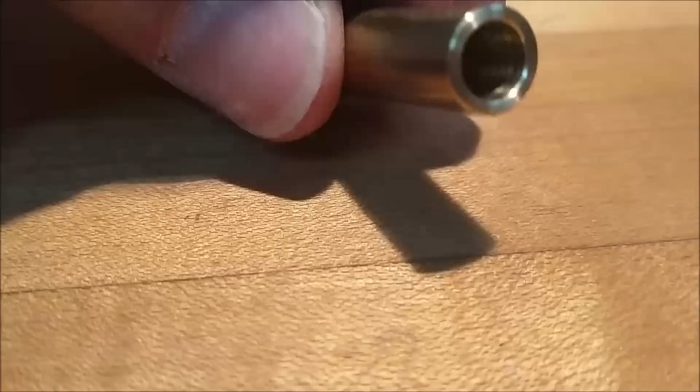Yesterday's effort was the production of these little guys right here, and this posed an interesting challenge because it is so short. This was actually done in an arbor that allowed the part to go down inside of it. I'll show you what the blanks look like. Started off looking like that and ended up looking like that. This particular arbor is the manufacturing arbor, and it is hollow from behind, so the arbor could stay stationary and I wouldn't lose any of my readings on the digital for all the cutters and the rotary table work that was done. Now these were done exactly the same way as the long ones in the back, these guys.

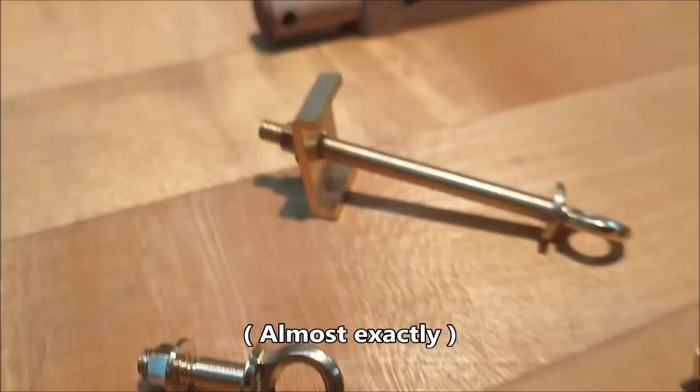I need to be honest and tell you that I was not looking forward to doing these guys because of the inherent challenge due to the length. You really can't get carried away on it because that's a 5-40 thread, a 3mm, 125 diameter thread on brass. So I didn't want to break them off.

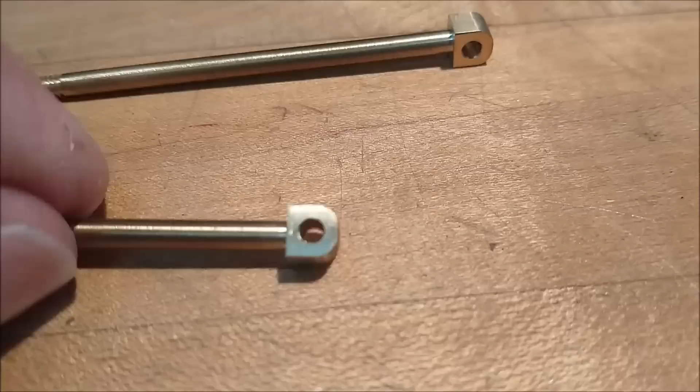Today's challenge, and one of the closing elements, is to make this little round hole in the end of this guy square. I'm going to try it two different ways, maybe one different way. But my mind tells me that I should probably set up the broach, punch these out square, and do it right. Once that's square, the wedges come into play to lock this whole thing together.

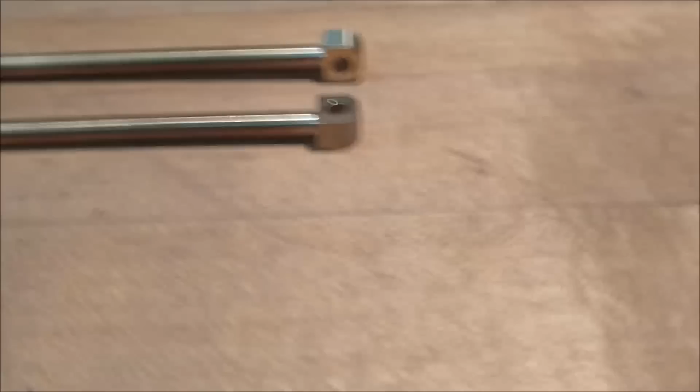The chassis is coming along nicely. This is the chassis in the back. And the tapered hole, or the tapered scallop mark right here, is simply done with a straight boring bar, and the block is set on an angle. Because the block removes more material in the back than the front, because it's on an angle, you get that tapered look.

Mr. Compressor checking in, saying good morning.

All right, let's move over to the mill. Set these guys up, get this done, move on.

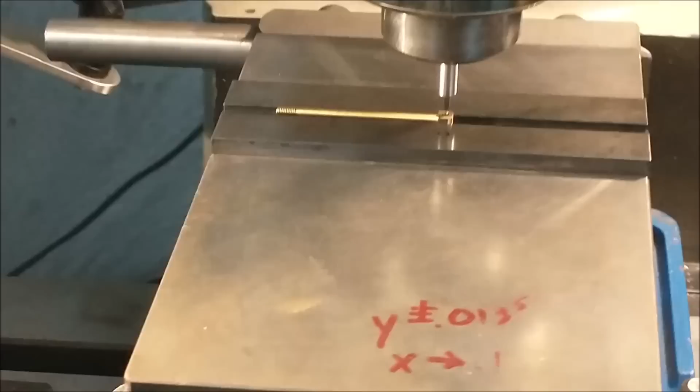That's the tiny little piece right there in the middle.

That slot is about 2.5 millimeters long, about 2 millimeters wide. I'm going to leave the original pilot hole witness mark on either side. I just want the top and the bottom flat.

Let's make the wedges. A little closer look at the final product. Top and the bottom are squared off so that the wedge seats in there better than it would on a round. Ideally a tapered slot would have been best, but that's just pushing my luck.

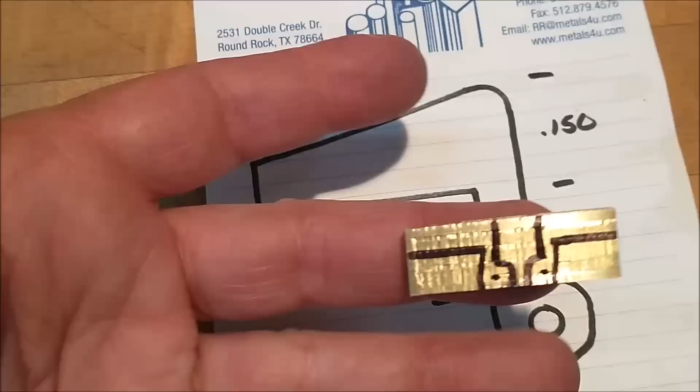The wedge I will attempt to make is going to look something like this. This is probably pretty rough, forgive me for that. This is the material I'm going to start with, and this is how I'm going to do it, back to back. First thing I got to do is narrow this down to about 2 millimeters. I know the slot is about 0.081, so I want this to go in there comfortably without too much side-to-side wobble.

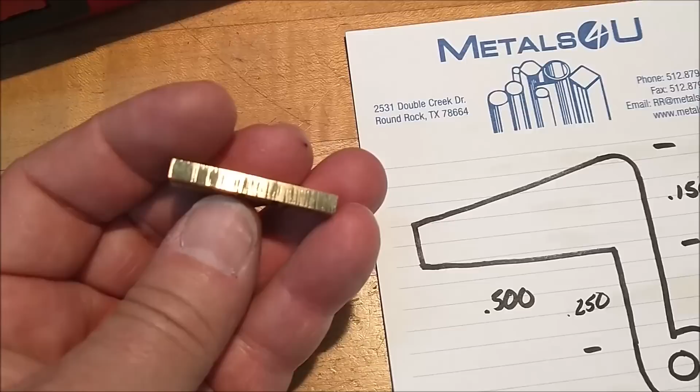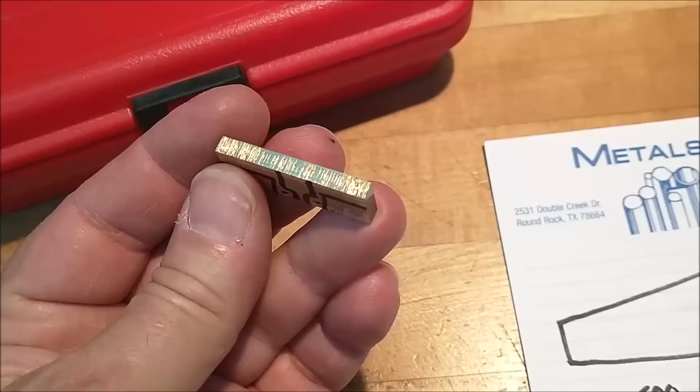Short of using an adjustable parallel to achieve my height, I am going to side mill this, clamping one end at a time to bring it down to the desired thickness. That's not a bad way to go, but it's got to be done in a climb cut. So if you have a mini mill, make sure that your table is snugged up and sufficiently locked, just so it doesn't run away with you. Let's put it in the vise, show you how it's done. I'll show you how I'm going to do it anyway, one of many ways, I'm sure.

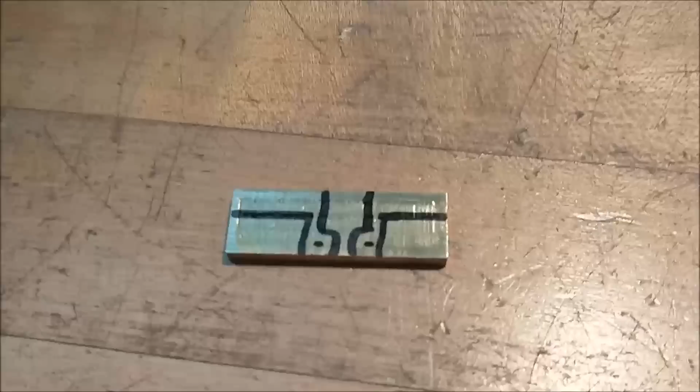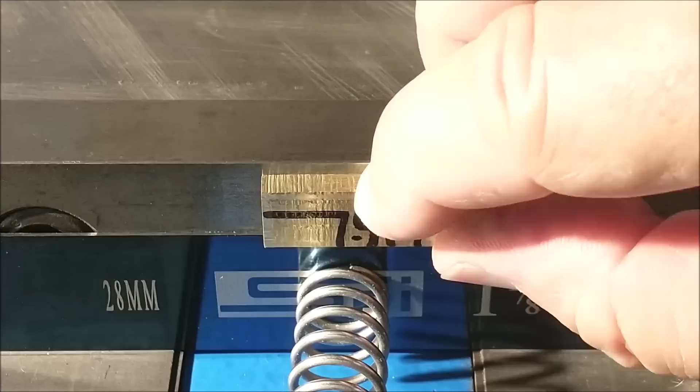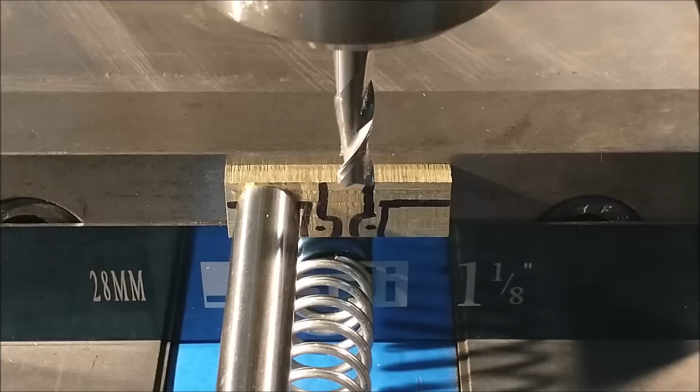First thing you want to make sure you do is have the entire part supported against the back of your machine, or the back of your vise. The height of the part has to be subsurface for the best results. I'm going to use a pin, and I'm going to keep the pin biased to one side of the blank. This will make sense in a second. The cutter itself needs to go completely past the part for a full side climb mill operation. I'm going to be cutting from right to left, so the rotation of the cutter is driving this material against this jaw. Try not to run into your pin.

I've zeroed out my Y digital. I'm going to take a measurement now, put the part back in, and finish the thickness.

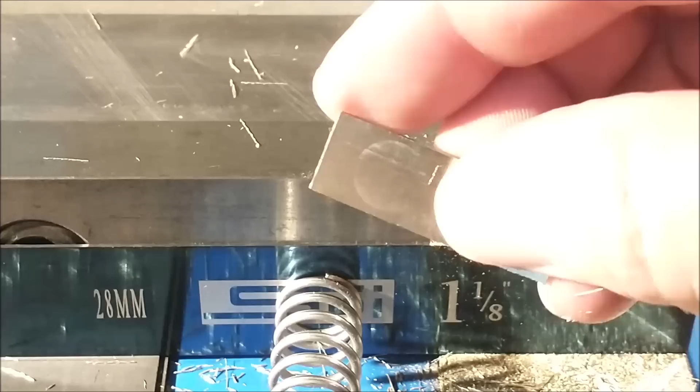That is a very reliable, very solid technique, and I'll put a link to a video showing you how to make exceptionally thin parts that you can actually profile into the face of your material. Put the part against the jaw, then run the cut exactly the same way I did, and as the cut progresses, the part will actually just fall out. It's a beautiful technique.

Well, there you go. That is 78 thousandths material, 2 millimeters, and now I'm going to make the wedges.

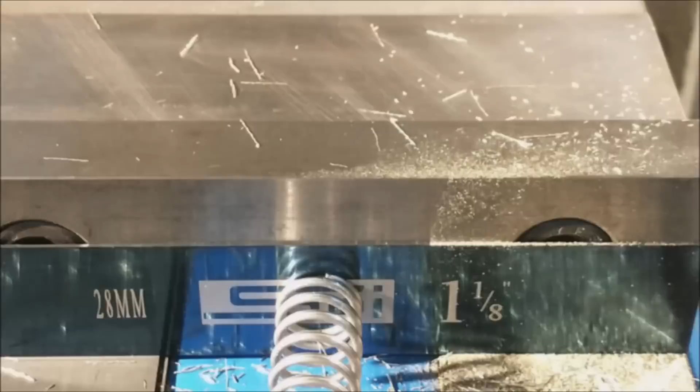Using a very similar setup to how the material was thinned down, I'm going to make a notch on the end.

The height of the bottom of this cutter is zeroed out from the top of that parallel and then elevated to the thickness that I'm looking for.

I will dive the cutter into the aluminum part and walk the cutter to the camera left until I see brass chips flying. That'll be 0,0. At that point I can form whatever notch I want on the end of this part.

I'm looking for 125 left over, about 3 millimeters worth of tang, and 500 over - 12.7 millimeters, half an inch, 0.5, whatever you want to call it. Let's put the notch in.

Then I'll turn the part around. I could do this end to end, but I'm once again relying on the climb nature of this cutter. Actually, it's the conventional nature of the cutter at this point because I want the material driven against the aluminum so that it doesn't clap.

If I bring it around this side, this side will have a tendency to lift as the material gets thinner. That'll make sense in a second. Here we go.

I think you can see the shine on the top of that. This is now X0, and whatever I dial in will be the thickness or the projection of the little wedge. Bear in mind that the wedge is inverted in this setup.

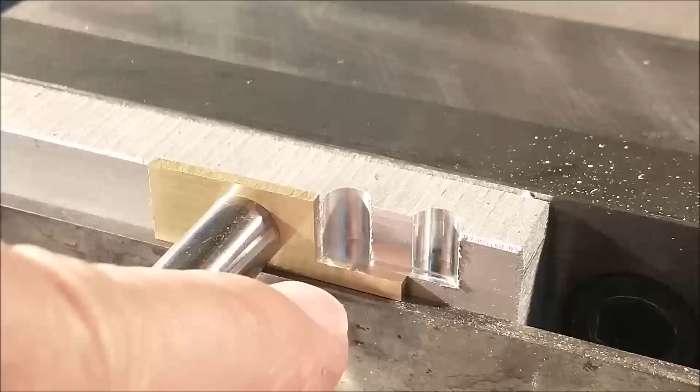The remnant left behind, the top will be the tapered section. That's what's going to cause it to lock. And the distance from the shoulder to the end is the thickness of the wood where the trunnion strap lays down. So I'm going to flip this around and do the exact same thing to the other side.

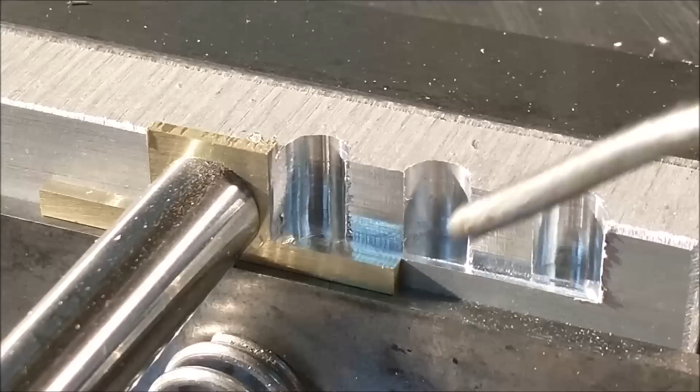So far so good. Now we're going to lay it down flat, put the chain hole in it, and start to profile the outside. A lot of this work will be finished with a file because it's not an elaborate piece. This is probably something you could do with a file anyway, but I chose not to do it that way. Here we go.

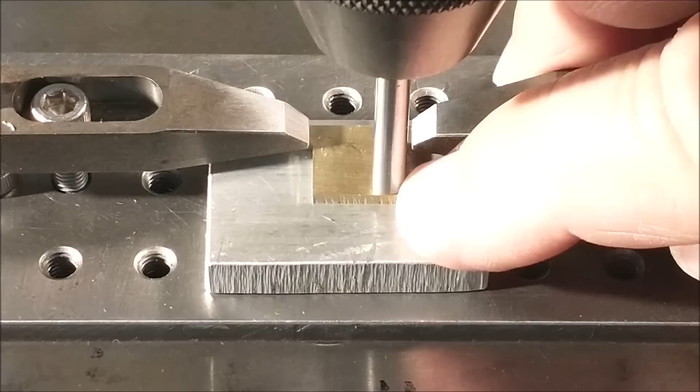Next operation in line is the chain link hole in the inner radius for the outside profile. This is a meatball operation - there is nothing precision about this, so I'm doing it with a pin. I'm lining up a pin tangent to the outside of the workpiece on the face and the side, both sides. This will be my incremental side on my digital, and this will be my absolute side, so I don't have to reposition the part twice.

Let's start here. Why not? Why not? You're already here, right? Why go back?

Okay, if you're scratching your head wondering exactly what that was, what happened? What did he just do? Oh, I don't want to say it. Here we go.

Back of the part will come down here, blend into that radius that I just made, and then it'll go around and off like that. So there's your part. Did the inside radius.

This will be done either by hand or maybe I'll just pop it on a rotary table with a pin. It'd be real easy to pick up right now. Just don't take the part off. Do both sides and come back and relieve the web right there, and that should be the end of it.

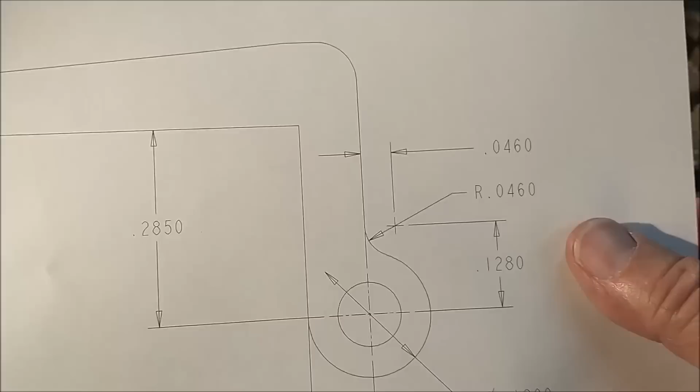If you're curious what those holes are for, with the parts positioned back to back, the lower holes are the center hole, that's where the chain is going to connect, and the upper hole is the radius for the back contour.

Using a pin the same size as the hole, I'm going to take the entire fixture over to the rotary table, clamp it down, and just interpolate this side off, and probably run that edge as well.

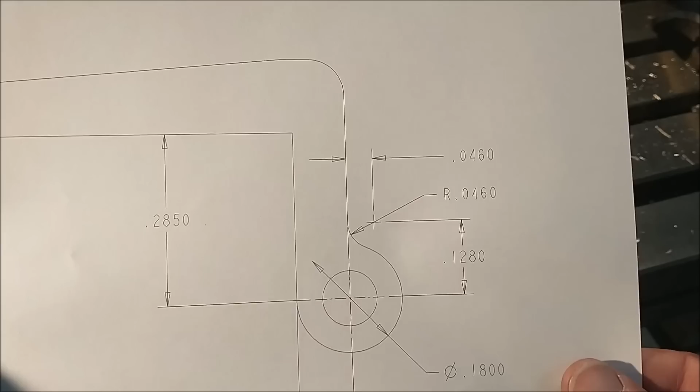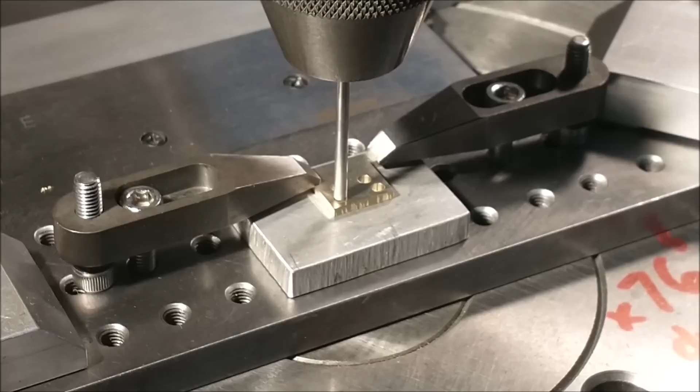The entire fixture has been relocated to the rotary table. Drill chuck with a pin in it, and the drill chuck center is directly over the center of the rotary table. Everything is clean and green.

We're going to shift the table off to the center of the second hole, the top one, and just interpolate the bottom round. Should be quick. I've also relocated the clamp a little farther in so I get a good bite on this piece, because I intend to cut this piece off while it's in this setup.

I'm going to go clockwise around the lower hole, starting at the top hole. Lower hole is over the center of the rotary table. Let's do this.

Okay, moment of pure honesty here. I am feeling way too much resistance from this cutter, and if you've got a good eye, you can see this cutter actually deflecting as it's hitting the brass. For a high-speed cutter to deflect when it hits brass, not cool. I'm going to flip this upside down and start over.

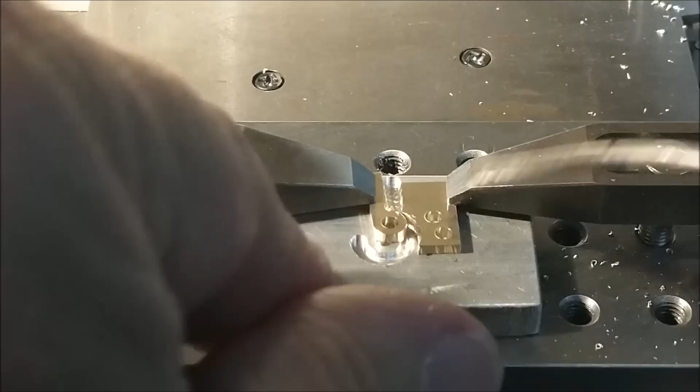That was a close one. Ouch.

Well, I can't tell you how much I didn't want to see that happen. That clamp is really tight, too.

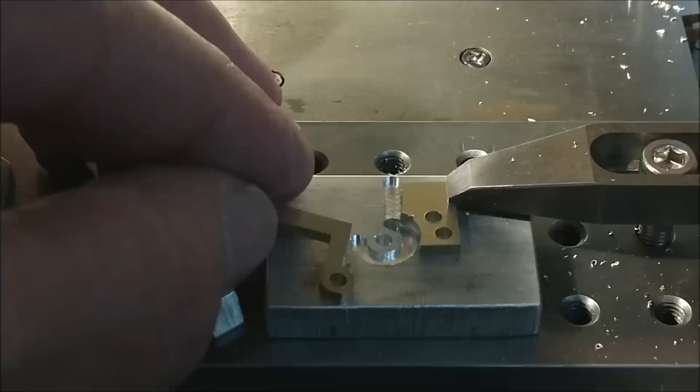Obviously not tight enough, Joseph. Let's see what we got. I'm about 15 thousandths away with all my numbers, so I am very happy that it jumped the way it did. Holy mackerel, holy mackerel.

There goes my nice setup. Okay, you see where I'm going. Got to do it off camera. It's going to take a while. Bummer.

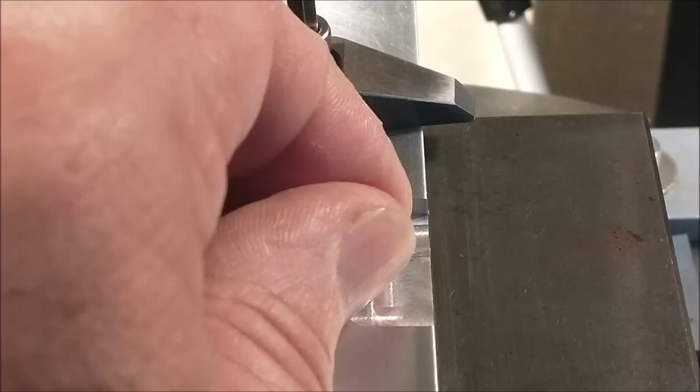Somewhere between the last shot and this current shot, I came to the realization that I am taking the long way around with these parts, but since I started it, I am going to finish it. This is the new fixture that I'm going to use, and it will constrain the blanks so that they don't go anywhere unexpectedly. That was unpleasant, and I don't want to see that again.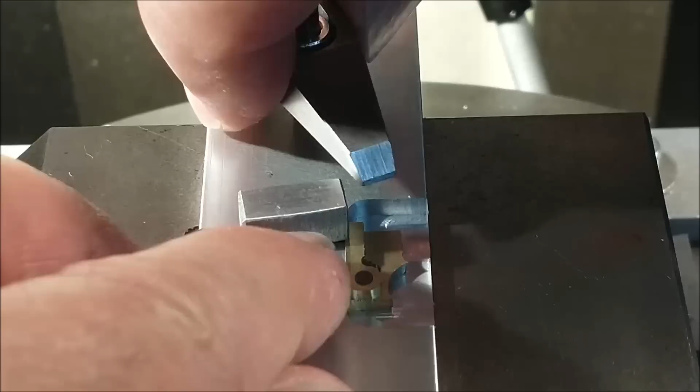So here we go, I'll stick this puppy up on there, lock it down. The pin's just going to keep it from sliding out, the track is going to keep it from going this way and that way, and the clamp is going to keep it down. Clamps should be used for holding parts down, not for keeping them from rotating or whatever else. Use a physical feature for that.

Let's get back to where we were before the unfortunate shift in the workpiece. Let's see if we can finish this geometry up here on the top and the bottom. I am going to take a very superficial rotary cut to create a track on this side so that when the cutter comes around on the actual part, it doesn't load up and cause something terrible to happen. So that'll be the first thing I do.

The cutter will be positioned. Right now the rotary table is the center of that pin, but the cutter is going to be up and over, offset to the radius of the vertical leg right there. So it's going to be right back there in that corner.

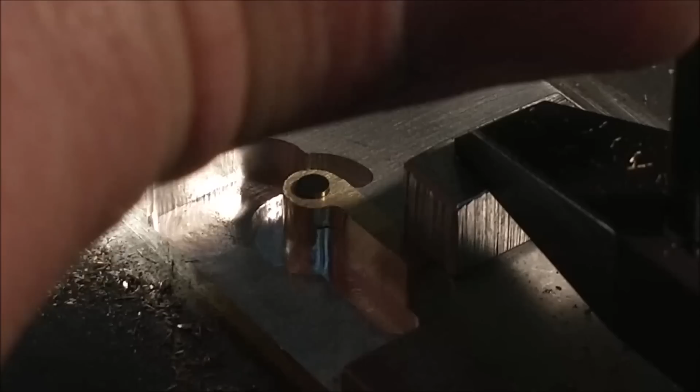Very much like this camera. Let's see what we got. Yeah, you can see a little bit of noise on the top part.

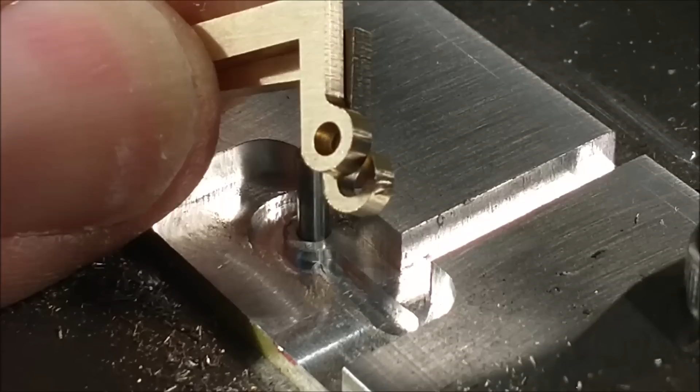Overall, I like it. For what it is, that is just fine. Let's deburr it, put the taper on the top, make it work.

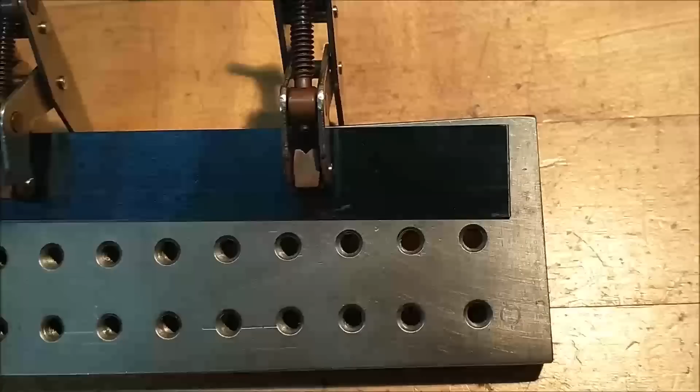Next operation after the profile is complete is to put this mild angle on the top. And when I say mild, that's about a 2 or 3 degree angle at the most. This is the fixture that I'm going to be using. It is incredibly primitive. This is an ultra thin parallel clamped on there at the desired angle, and the part will register right here on the corner.

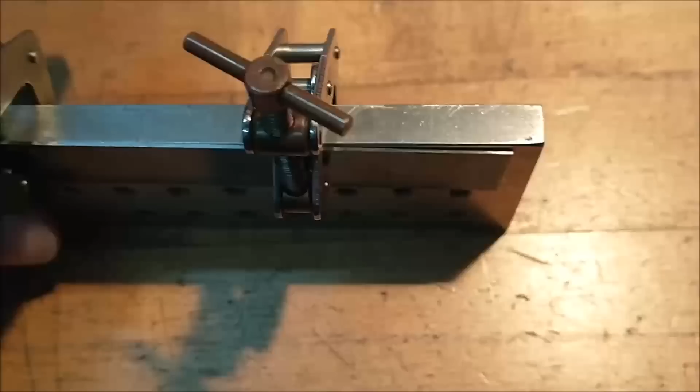Now I chose this setup because I wanted something repeatable. It is going to be a trial and error trying to get these wedges to go on these trunnions right where I want them. So I wanted something that I could pop off real quick and pop back on. This will be held in a 6-inch Kurt vise on a parallel, standing upright. Camera will be in the front. Let's move over to the mill, set it up, and do it.

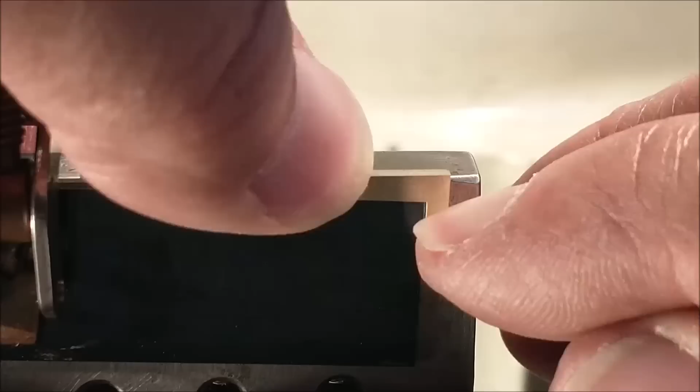Off camera, I am trying this, fitting this actually into the trunnion strap and cleat. And the wedge is so mild that advancing it only takes a couple thousandths of an inch off this top surface to make it move quite a bit. So I don't want to go too far because then it'll be loose.

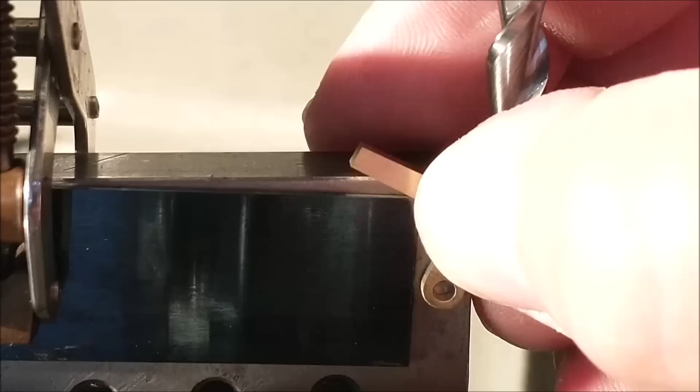I will be doing this a half a dozen more times, so I will come back when they are fitted and show you exactly how they fit into the trunnion strap. But that's the part. That fussy little part.

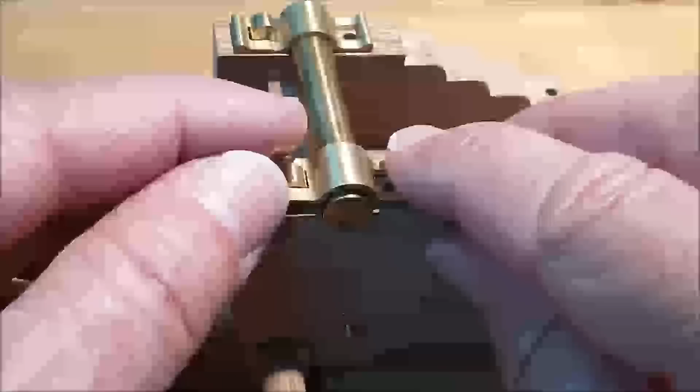Let's take a look at the fit and function of those parts that we just completed. These are the trunnion straps. The barrel hangs right here. And for repositioning, transport, whatever, these things need to act like hinges and stay put when you don't want it to move anywhere. So these little wedges go right across the strap here.

And because it's a wedge, the farther you push it, the tighter it gets. And naturally, when the wedge gets tight, it's hard to unloose it. Had to work that in there.

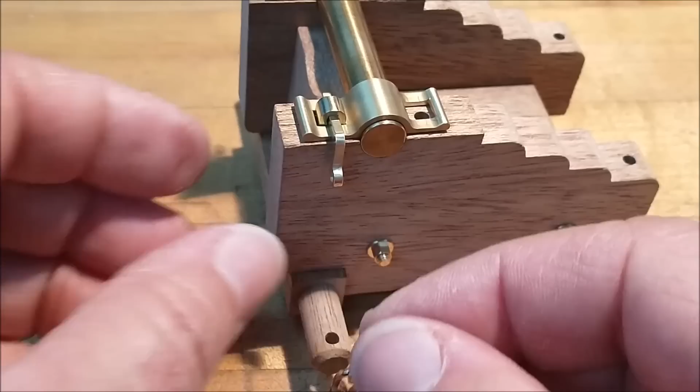The eyelets that I took so much time adding to this little thing will be anchor points for some decorative chain to be added after the fact. This is the chain that I've selected. It is going to go from that eyelet to an anchor point somewhere on the side, just a little piece, just so that the wedge does not get lost when it's removed.

I am very pleased with how that came out. That was a little bit more work than I had thought it would be.

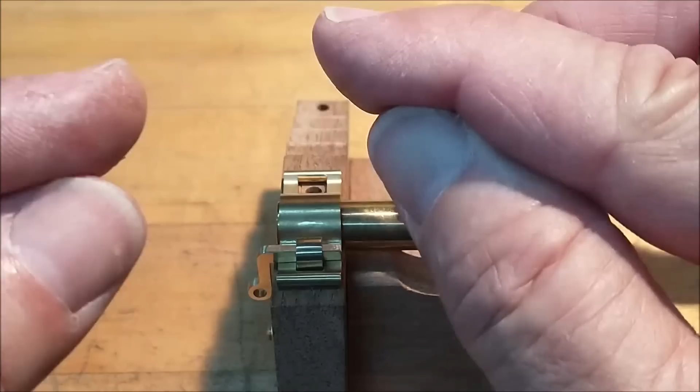I'm going to call this guy a wrap. We've got one more video left to do. There will be anchors in the corners here, one in the front. This is going to get stained and assembled, and probably stick a firecracker down the barrel, make it go bang to keep a lot of you guys happy.